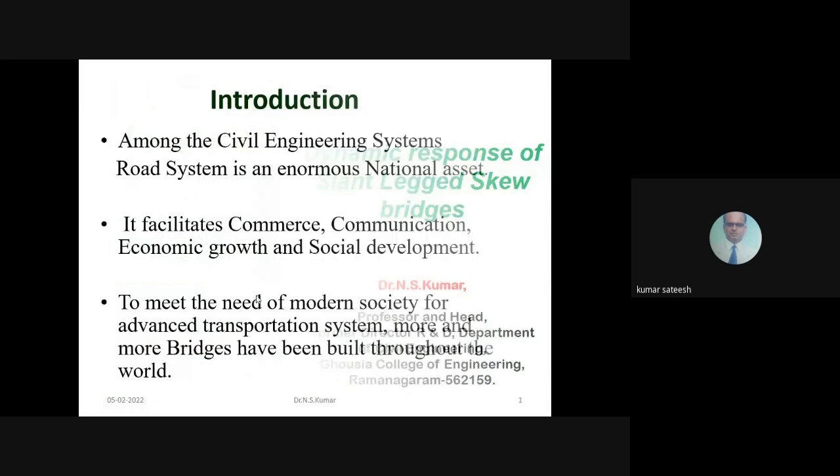As all of you know, among the civil engineering systems, road system is an enormous national asset. Nowadays, they are investing a lot on building flyovers and bridges. It also helps in commerce, communication, economic growth, and social development. To meet the need of the modern society, for advanced transportation systems, more and more bridges have been built throughout the world. Usual bridges we design talking only about static analysis.

What research we have done is, with billion ton miles of commercial traffic nowadays, we have to give importance to the dynamic response. Moving dynamic vehicles create a lot of dynamic stresses on the pavement, and we have to take care of that. Even in bridge code books they are implementing this, especially abroad, and even in India now they are taking a lot of care. There are two types of responses: one is static response, another is dynamic response, which is the response due to moving load.

A load which is a function of time is called dynamic load, and the response due to that is known as the dynamic response. The very interesting fact is dynamic response is much higher than the static response. This is a very important point.

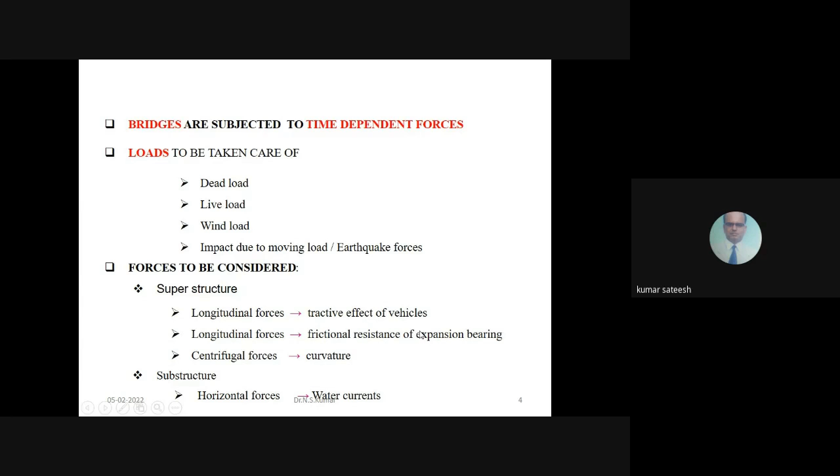Now, the forces to be considered for superstructure are longitudinal forces due to vehicle tractive effect, frictional resistance due to expansion bearings which should not be neglected, and centrifugal forces due to curvature. These are very important things to take into account while designing for dynamic effects.

Now coming to the particular case, slant leg bridge is one among highway and railway bridges. The superstructure and substructure are treated as one unit in this case. It consists of infinite degrees of freedom in our dynamic analysis, because it is not discretized.

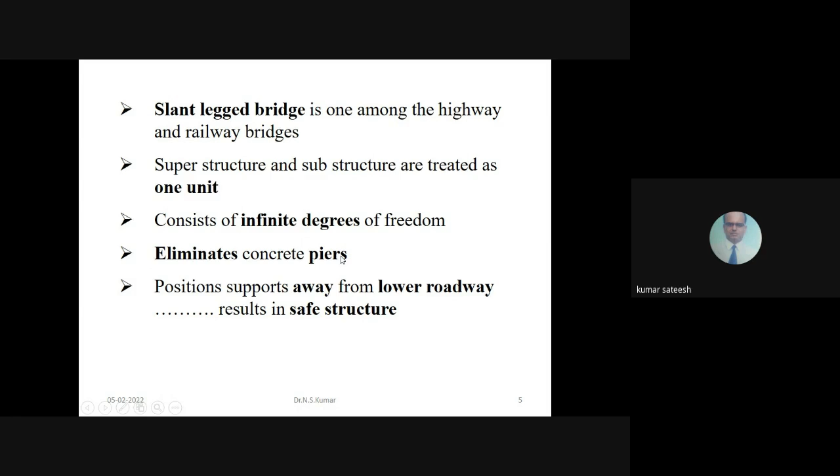Overall, if you say it is infinite degree, it will eliminate the piers, leaving only the left abutment and right abutment, and it will also help since it is away from the lower roadway. These are all important things.

Example of how it looks: slant leg skew bridges. One example exists in Switzerland, which is 70 meters. Span is 18 to the left, 34 in the middle, 18 to the right, so we say it as 18, 34, 18, which adds up to 70 meters. Distance between the foundations is 55 meters, and width is 6.5 meters.

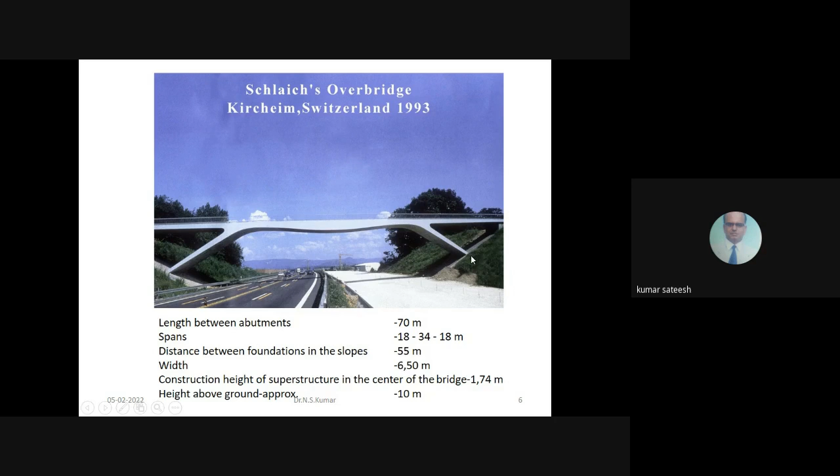Construction height of the superstructure at the center of the bridge, and height above ground, are the data available. The main point is to the left and to the right, this is a clear way so that vehicular traffic is unaffected because there are no piers at all. Only the left side is slanted, connected to the right bund. This is what is known as slant-leg skew bridge.

Some examples I am showing you with all the details: this one near Germany, and this one near Switzerland and the border. All these are existing structures.

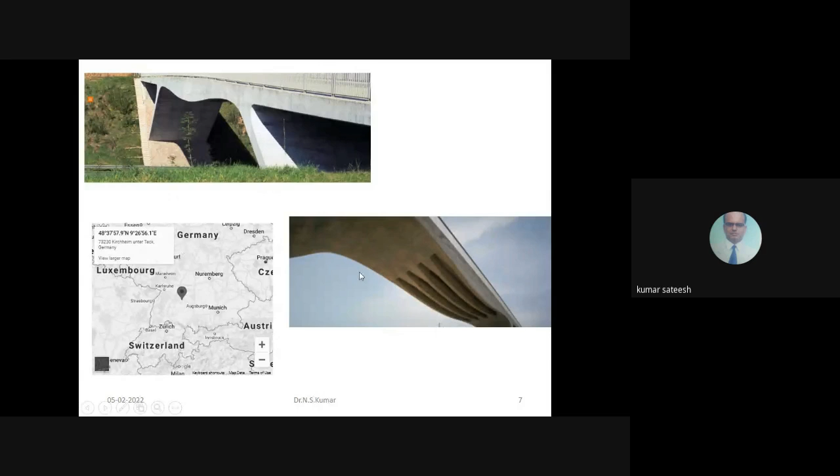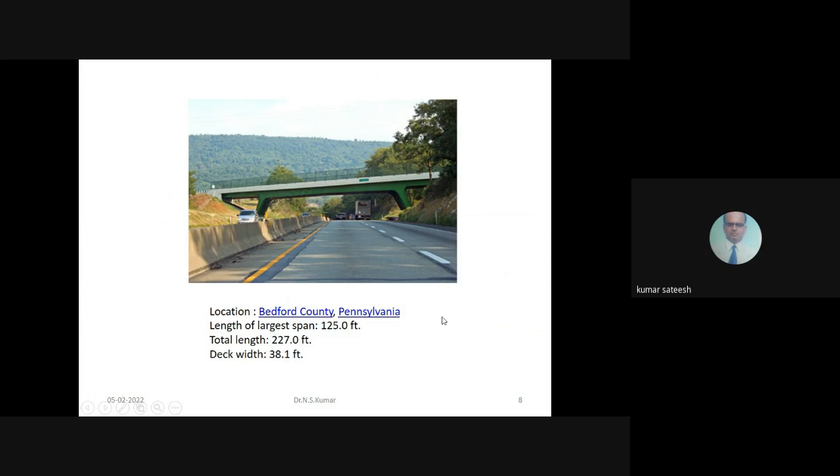This is important. For example, Bedford County in Pennsylvania, this is around 125 feet, total length is 227 feet, width of the deck is 38.1 feet. See this figure, this is existing.

One example, this one from New Hampshire, dimensional length is 160 feet, total length is 295 feet, width of the deck is 65 feet, angle is 10 degrees. So as you go on changing the skew angle, what happens, and what will be the maximum angle? This is our main point of research.

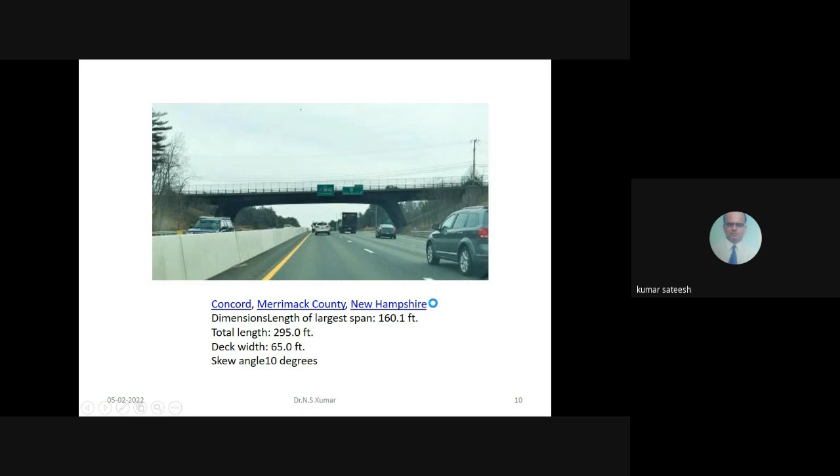So this is why I wanted to talk on this and how they have done it abroad. These are all existing things. Now you come to the next slide. You see here, 295 feet plus, 65 foot deck width. Now if you see this, one minute. I am giving you the examples of all this, New Hampshire and all that.

Now the question is, dynamic stresses are greater than those at static loads. As I have told you already, dynamic response of a bridge resulting from the passage of moving vehicles is a very important study. Now, how do you classify this is the first point.

We can take it either as a continuous mass or as a discrete mass. This is what we teach even for students in dynamic classes. It means either it's a lumped mass approach or a continuum approach.

One more is called orthotropic plate theory, which is 2D with a continuous mass distribution. Either we can use this type of theory or go for finite element method using discrete theory, which many softwares now offer.

So overall we have continuous mass distribution, discrete theory, and orthotropic plate theory which is 2D. Now coming to the lumped mass approach, we have 1D, 2D and 3D. This is how we study the dynamic response in case of any structure.

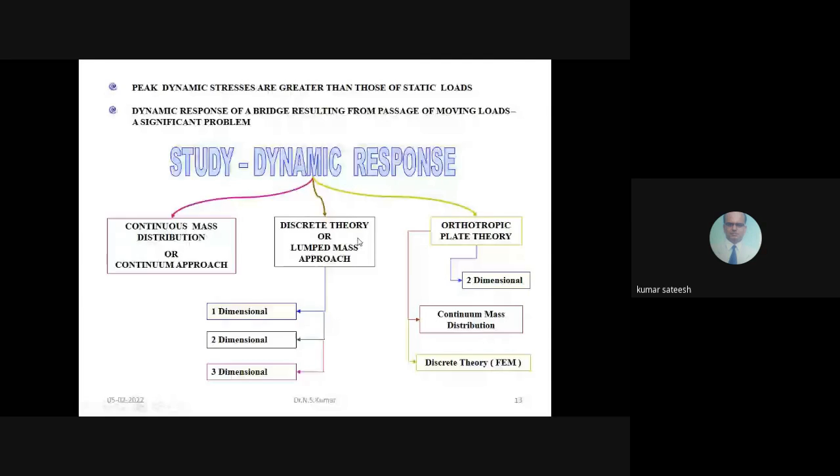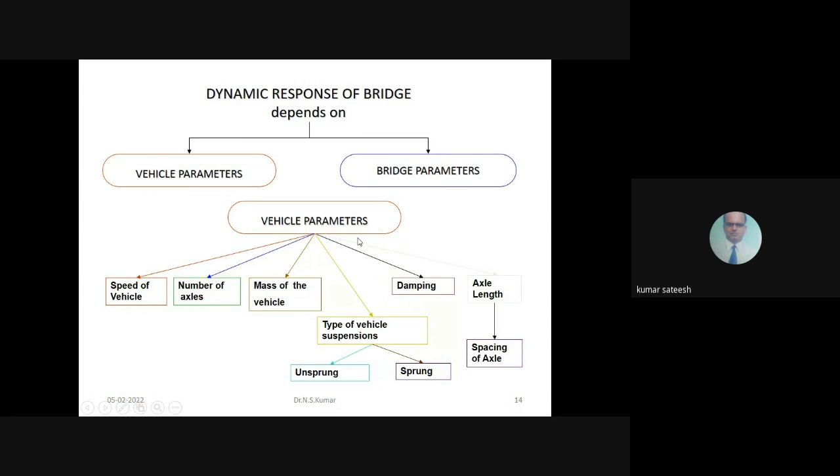Now in particular to bridges, this depends on vehicle parameters and bridge parameters, and a lot of vehicle parameters have to be considered. For example, speed of the vehicle, number of axles, mass of the vehicle, damping, type of vehicle suspension which may be sprung or unsprung, axle length, and spacing of the axle. These are the things we are considering.

Now, we have already done a lot of research, that is called literature review. It started in the year 1974 itself by Ghobarah and Tos. That paper analyzed the Foothill Boulevard undercrossing Southeast Bridge, so this is one of the starting points.

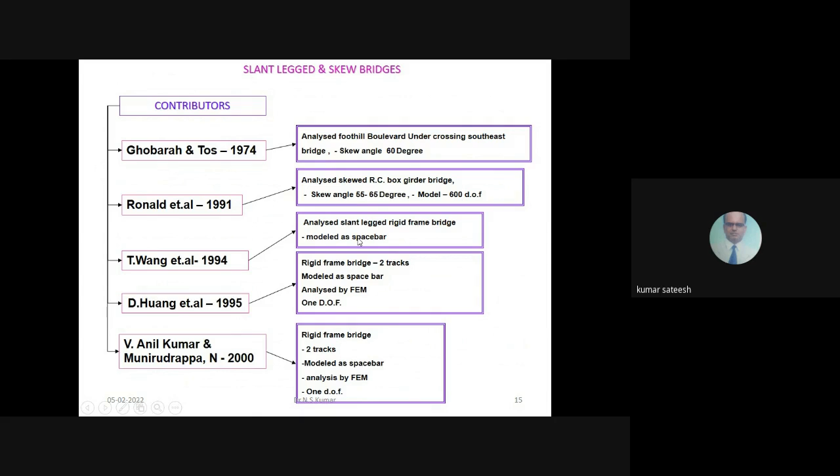Next, so many people contributed. For example, in 1991, 94, 95, and 2000, also from Munirudrappa, who was my PhD guide, and his student. They studied rigid frame bridges, skewed RC box girder bridges, and slant-legged rigid frame bridges, also by Wang. These are some of the literature reviews I did.

Then what is the work? Some parameters to be considered, mainly in this work regarding vehicle: axle spacing, vehicle speed, damping of the vehicle. But regarding bridge, we consider span, stiffness, mass, damping, skew, pavement roughness which is a very important factor, roughness coefficients, surface roughness, and spacing of longitudinal and cross beams. These are the things to be considered.

But the actual work involved in this report is free vibration studies, forced vibration studies, how to assess surface roughness related to dynamic response, vehicle bridge interaction studies which we call VBI, and modern structural control systems. Nowadays they are using tuned mass dampers, to be adopted to achieve the desirable response for an external load. So these are the present study.

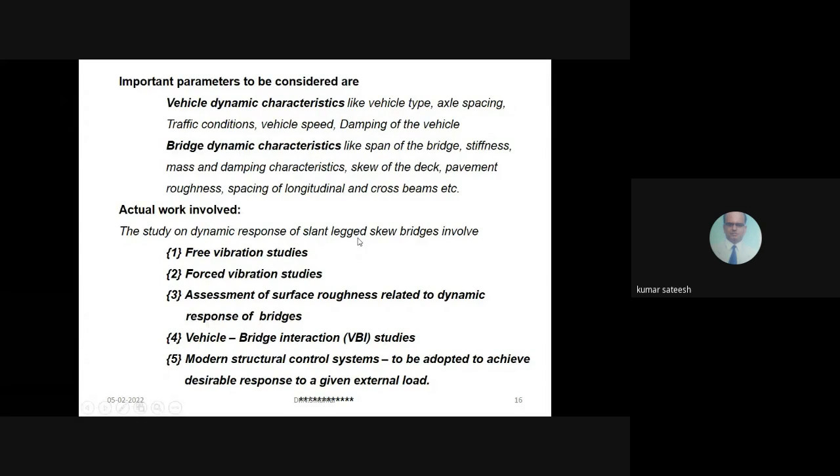What is done is, we can't give a choice; we are doing both free vibration and forced vibration, along with vehicle bridge interaction, VBI, which has to be considered. Now this whole topic is based on one factor called dynamic load factor or dynamic amplification factor, that is called DAF.

Hope I am audible, participants? Hello, hello. Yes sir, yes sir, okay sir. Audible, sir. Audible, sir.

Thank you. What is happening in this whole topic is load factor, we call it DLF in this topic because it's due to dynamic effects. DAF means the ratio of dynamic deflection to static deflection, dynamic deflection due to movement of vehicles divided by static deflection due to self weight. This is the very important study here. It's called DLF, and it's a function of the natural period of the structure, which is one over frequency natural, the reciprocal of the frequency, and relates to how much time that impulse is there.

The impulse may be any shape we take for analysis - trapezoidal, rectangle, triangle. It's a small time for a small duration where a large force will be acting. So a force acting which is very high in magnitude, but with time duration in seconds, that is called an impulse.

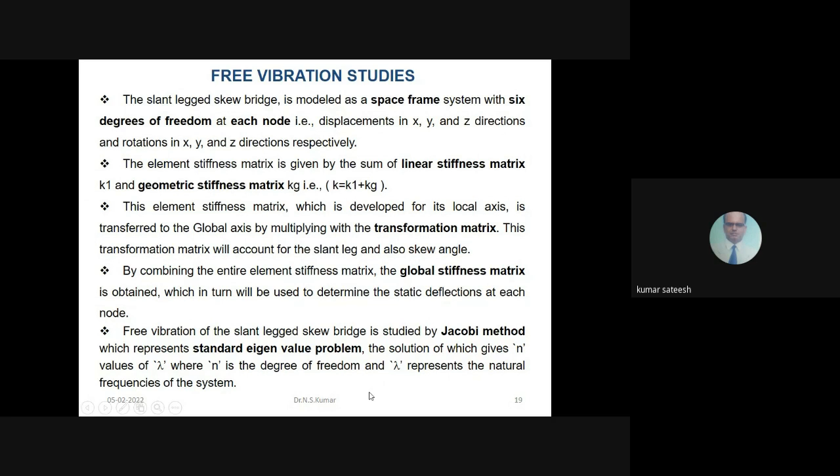So the free vibration of the slant bridge is studied by which method? Jacobi gave a particular method in mathematical analysis which represents an eigenvalue problem, as we know in dynamic analysis. The solution gives n number of natural frequencies, where n is the degree of freedom and lambda represents the natural frequency.

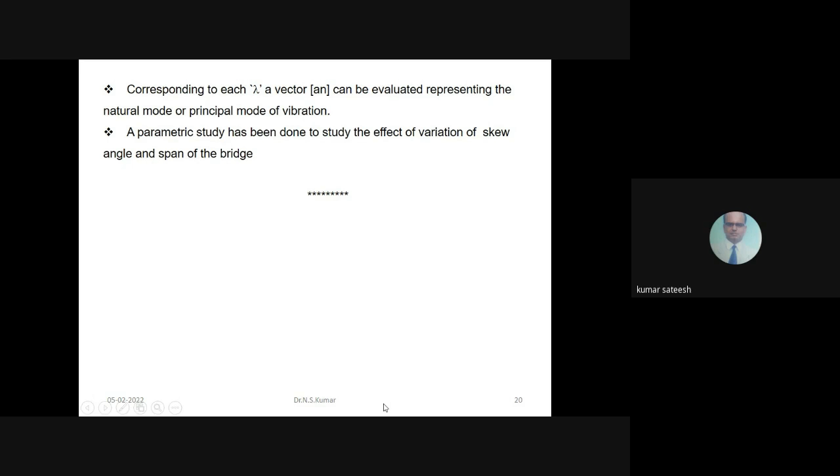Based on this, each lambda gives us a vector, which can be evaluated representing the natural mode or principal mode of vibration. So a parametric study will be done to study the effect of the skew angle and span of the bridge. This is the whole story for free vibration analysis.

Okay, how to do this formulation of the stiffness matrix? If we are strong in mathematics, or know the background of matrix analysis of structures and structural dynamics, we can formulate the member stiffness matrix. This is what I have explained here in detail.

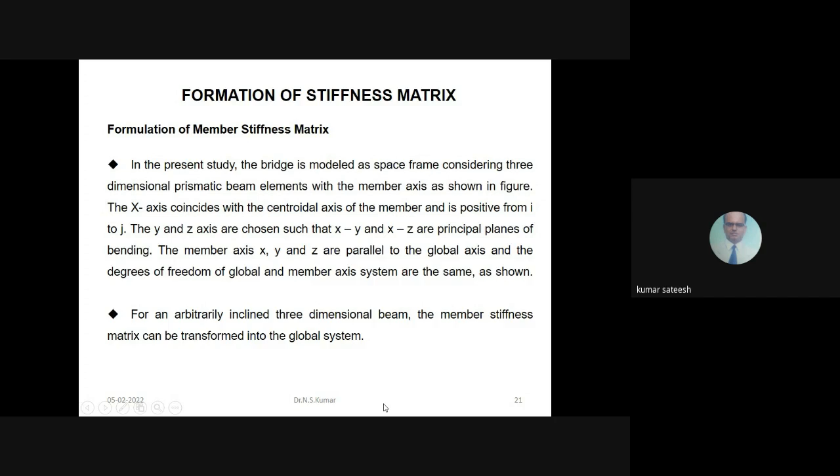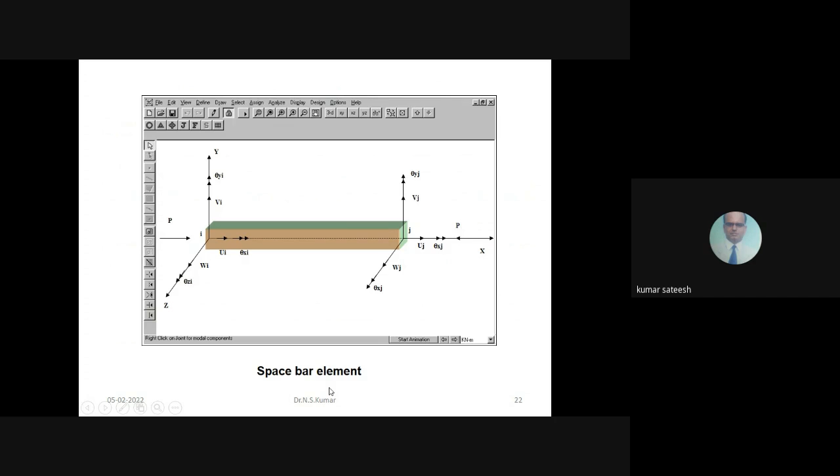Please see this sketch of a space bar element, with example I and J nodes - I'll explain one bar. As I told you, there are 6 degrees of freedom on the left and 6 on the right - 3 rotations and 3 displacements - theta xi, theta yi, theta zi. I'm showing you all the symbols.

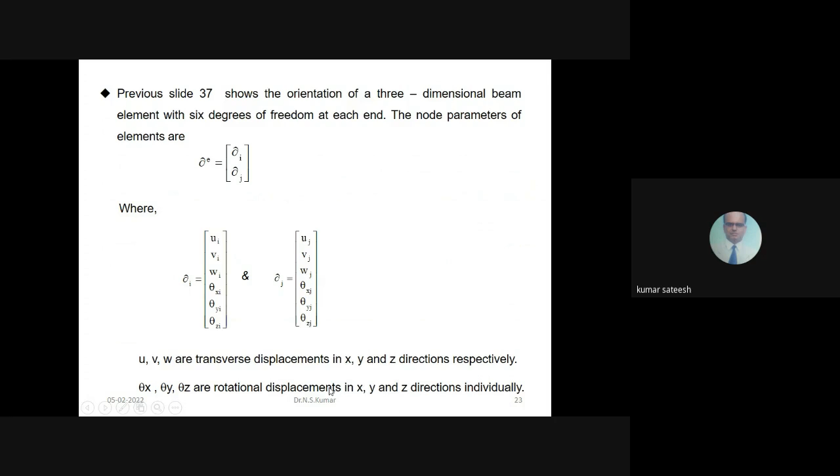It's one element. Now I'll explain this one by one. Each ui, vi means these are the displacements - all transverse displacements in x, y, and z directions, and for rotational displacements, theta x, theta y, and theta z.

Then we know the standard element stiffness matrix - as I told you, it should be linear plus geometric added together. After getting this, I must go for the final step, the transformation matrix. What is that? I am explaining here.

It's a diagonal matrix - only diagonal elements are available, R, all others are 0, 0, 0, and it's 4 by 4 in size. Now let's go to the next one. These are all much of mathematics, just shown to explain - all these are basics.

See here, this is it - finally we get the stiffness matrix, that is the transpose, R transpose Km into R. This is usual, we know how to do this.

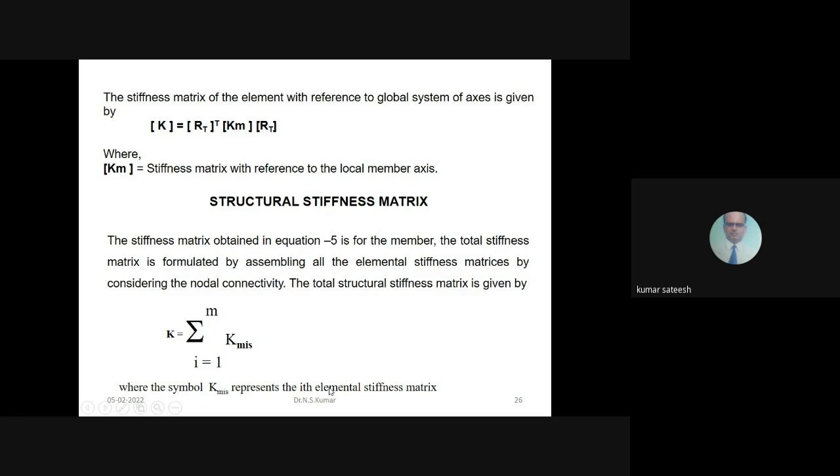This is the formulation. Similarly, finally, to get the global matrix, it's the summation from one element to any number of elements, i equals 1 to m, each taken as sigma. So this represents the element stiffness matrix. Now this is regarding free vibration dynamic analysis - now let's come to static.

Statically, we know F is equal to K delta, or Ku. Same formula, but the question is F is a vector, K is a matrix form, and U is displacements. This gives us the displacement vector, load vector, and structural stiffness matrix. Already I have explained, it's a square matrix.

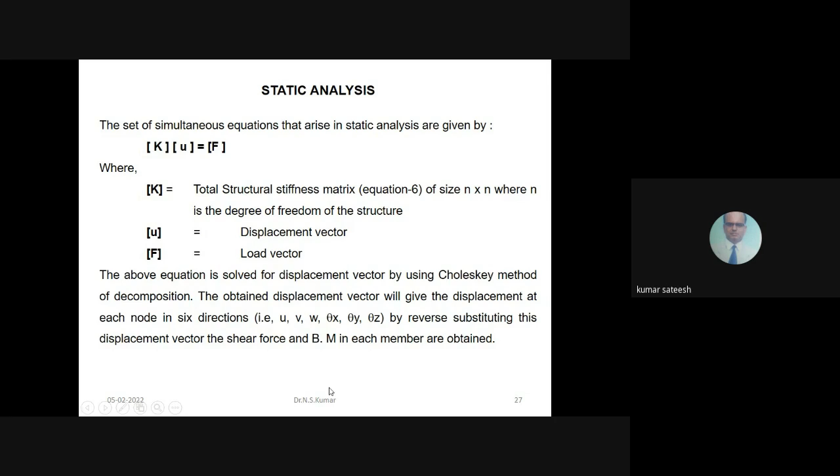The above equation has to be solved for the displacement vector, and what method is to be used is the point. Finally, after going through the literature review and so many things, Cholesky method of decomposition is the best. This is a very easy procedure which many have learned in mathematics in UG and PG classes. Cholesky method of decomposition will be used, and we are going to get the displacement vectors.

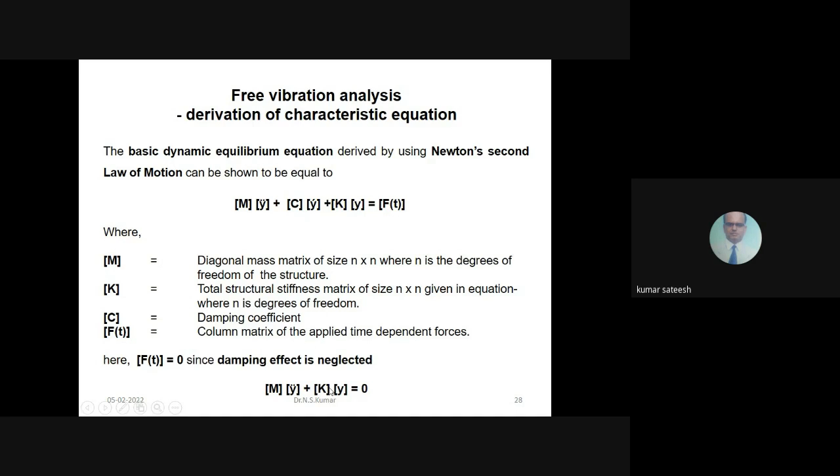These are all standard dynamic procedures, and this is done by Fourier. He tells how to do this: periodic motion can be represented by a series of sines and cosines in Fourier series. This is the whole thing we have applied here, and hence with this mathematical background, Y double dot, how to find the acceleration.

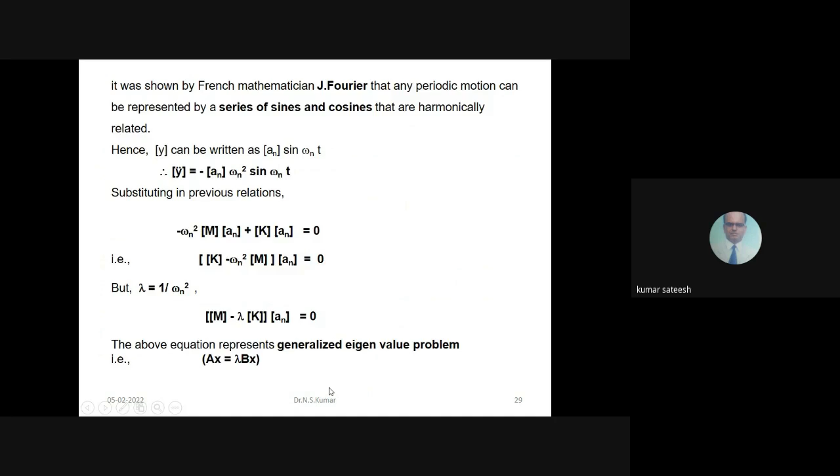Then finally the form will be M minus lambda K, of an, equal to 0. The above equation represents a generalized eigenvalue problem, which I have already told you. To get a non-trivial solution, we know the determinant must vanish - the determinant corresponding to this vanishes. So this is the procedure for all structural dynamic problems. The above determinant we call the frequency determinant.

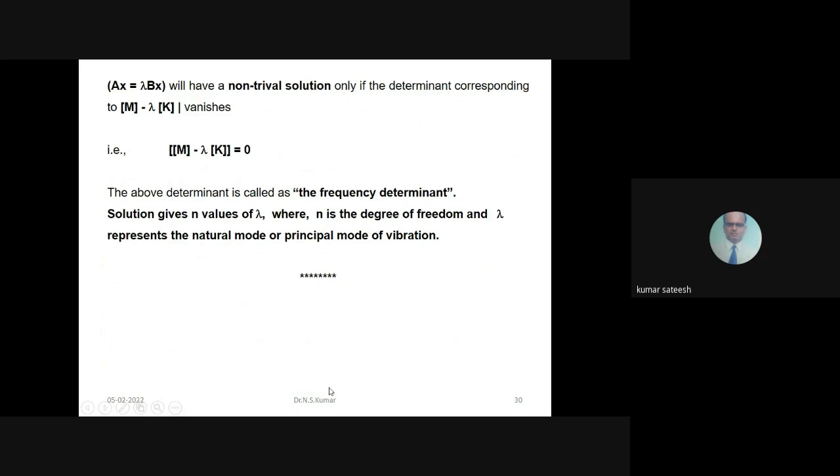Solution of this is nowadays very easy because software is available - we need not do hand calculations. You get in seconds all values of natural frequencies, and also n is the degrees of freedom, and you get all natural modes or principal modes of vibration. Then after getting this, how to convert the generalized eigenvalue problem to a standard problem - that is the next step.

All this I have explained, just I am repeating it. And finally, I told you I am using what is known as Cholesky's method.

After explaining all this, suppose you come to numerical computations, how to find - the idea is to find natural frequencies. Computer programs should be developed, which I have developed for my research work here. That's why I am explaining what I did, using MATLAB in those days.

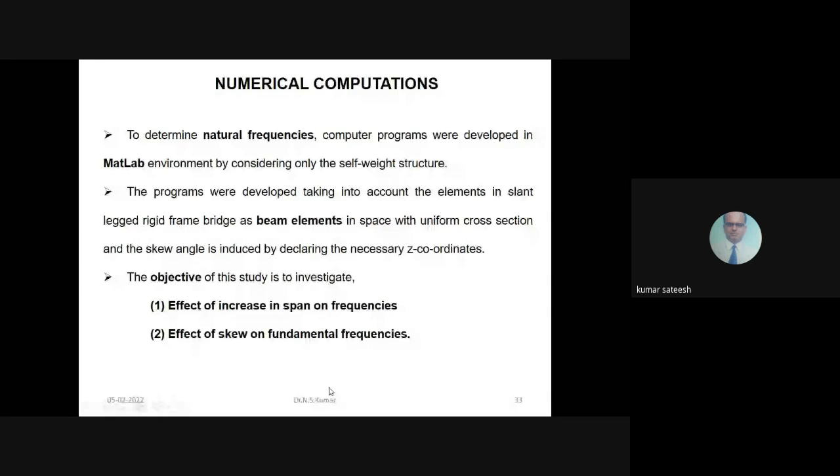These programs were developed taking into account elements in a slant legged rigid frame as a beam element in space with 6 degrees of freedom. I explained different cross sections you sketch are all considered, and skew angles are varied. What is the objective? To know the effect of increase in span on the frequencies - as span increases, what happens to frequencies - and the effect of skew on fundamental frequencies.

These are the two parameters taken for study, and the bridge is modeled as a space frame, already told you as 6 degrees of freedom. The span considered is 20, 32, 20, so it will be 72 meters. Slant legs are at 45 degrees to start. Cross beams are spaced at 8 meters. Longitudinal beams are at around 4 meters. Cross sections considered are T section, I section, and box section - these three sections were taken into consideration for our study with 45 degree slant.

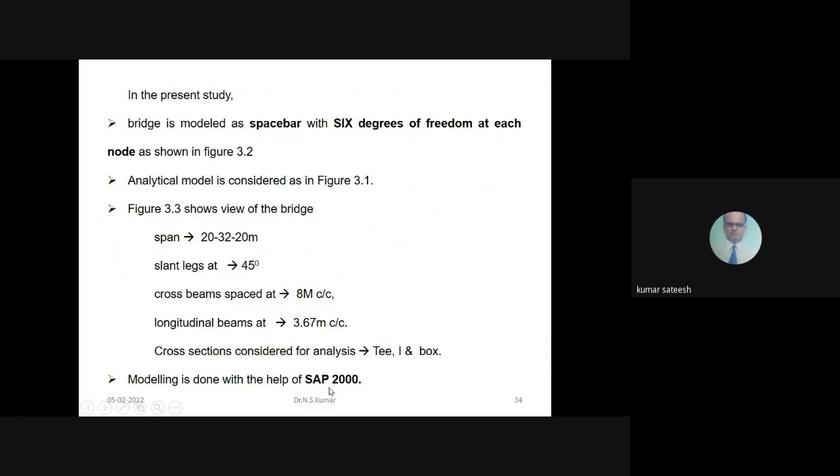Then what happens? All these were modeled using SAP 2000. So what happened after modeling? We came to know we got some first five frequencies which are very important for both 1D and 2D behavior, and different spans are also considered - 12, 15, 12, 15, 18, 15, 17, 21, 17 like that. And we have taken three sections: T, I, and box.

It is observed that as span increases, frequency decreases - that is the first point. Second is with respect to skew: as skew increases, it was observed that the fundamental frequency tends to increase non-linearly.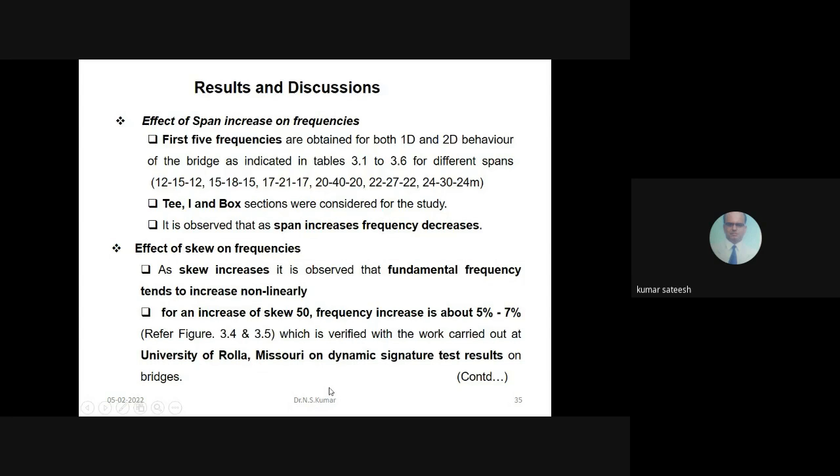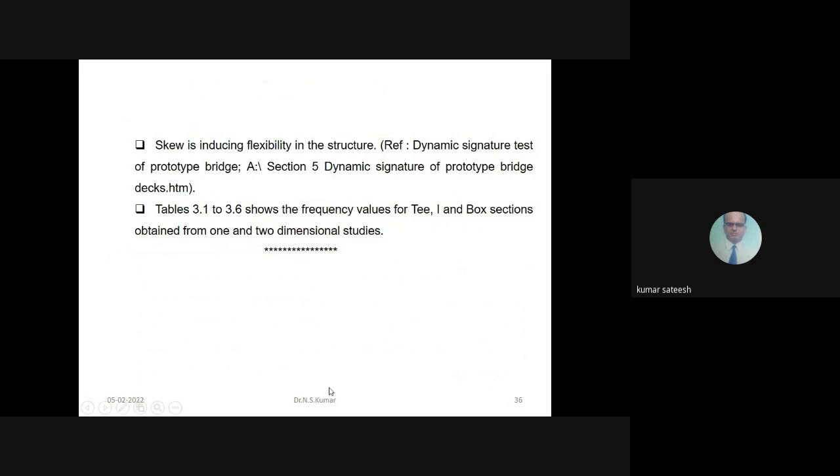So we should be careful about skew angles. It is a non-linear increase. For an increase of 5 degrees, frequency increase is 5 to 7%, which is verified with the work carried out at University of Rolla, Missouri on dynamic signatures of the test results. Those results I verified again, and we came to know from our experiment the skew is inducing flexibility in the structure.

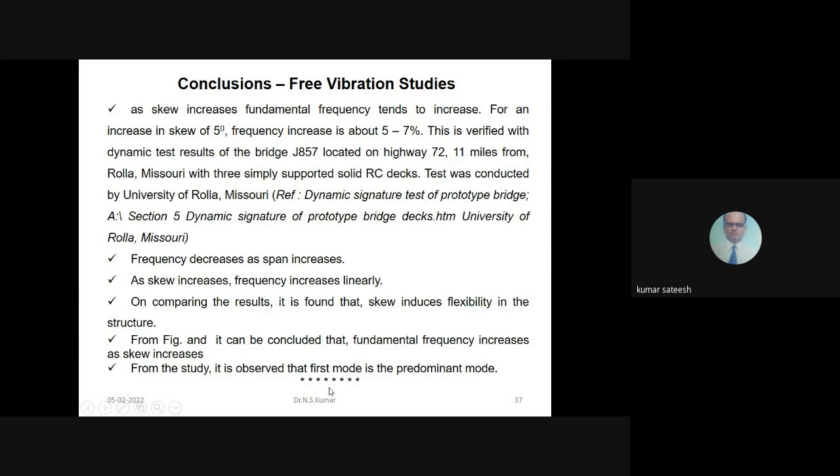So final conclusions, what did I tell you? Frequency decreases as span increases. Skew increases, frequency increases linearly. After a certain degree of skew, it becomes non-linear, and that is very important. The range will be around 5 to 7%. These are what we have observed in our research study.

So this is just the result analysis. Frequencies F1, F2, F3, F4, first 5 frequencies. Spans have been considered for our analysis. These are the frequencies for the slant legged skew bridge of 1D, one dimensional, area of the T section, moment of inertia for this. Similarly for 2D, what are the changes?

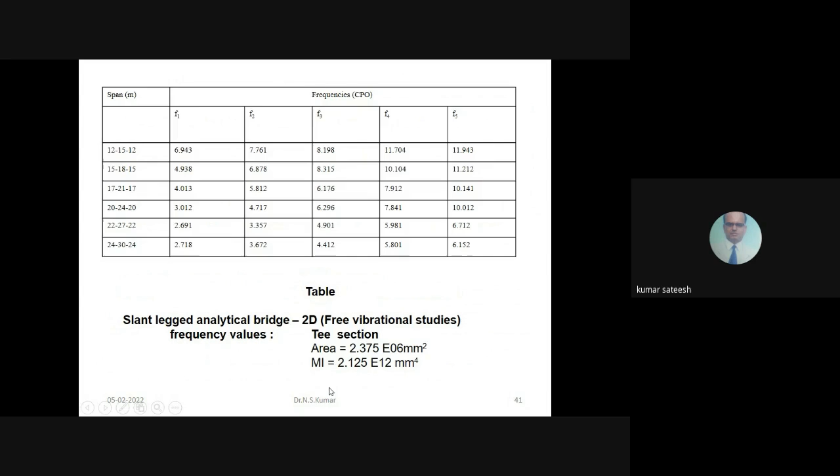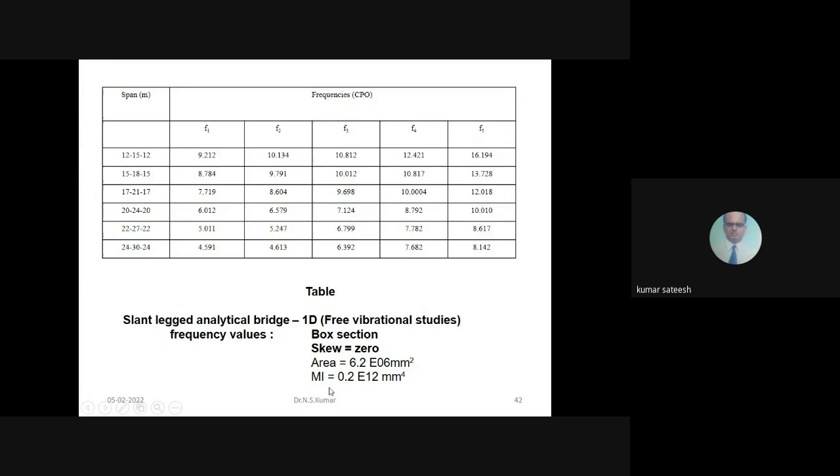Similarly for this one, free vibration for I section, free vibrations for T section. Again 5 frequencies. All these were calculated including box section with zero skew also, meaning without skew, then we went for skew increase. These are the very important studies done for all the types of sections, and we use this analytical model of the bridge because we have to analyze.

So how many nodes? 17 nodes, 1, 2, 3, 4, 5, 6, 7. See here, the deck has been discretized, and the slant leg 5 to 16 is one stick, 11th node to 17th node is one stick. So 5 to 16 and 11 to 17, between 0 means no skew.

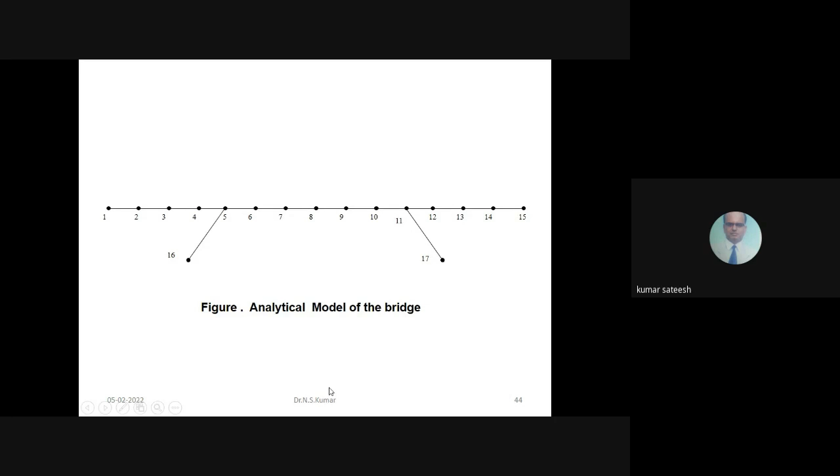Next you go to 10 degree, 12 degree like that. Minimum and maximum we have to fix so that at what stage you will get non-linear skew variations. That was also checked. So this is what was actually done for our analysis, free vibration using SAP 2000.

This is the model I am showing. See this, you are seeing the screenshots. What is done, it's not simply somebody's work, it is my work for my research. This is the thing, and also these are your variations.

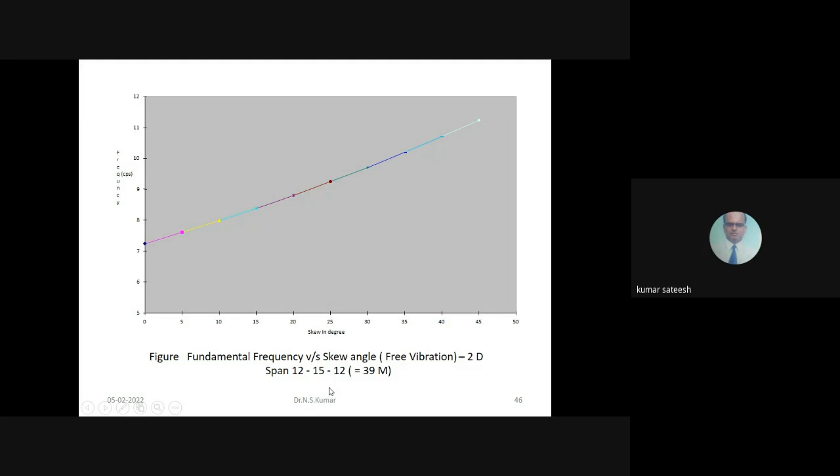What CPS, okay, cycles per second, frequency versus skew degree between 0 to 50 degree variations, fundamental frequency versus skew angle. Example, one span I am showing you like that. All the spans were analyzed, and these are the plots for all the different ones using SAP.

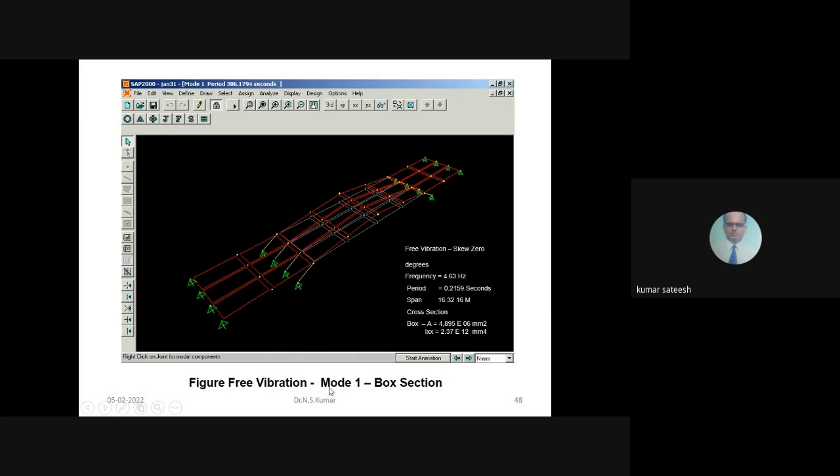This is the modes of vibrations you are seeing here. Period is 0.21 seconds for this span. Cross section is shown, frequency 4 hertz, 4.6, no skew. Suppose skew goes on increasing, what happens to the period, frequency, cross section, how much? All this is more than 6 years of study.

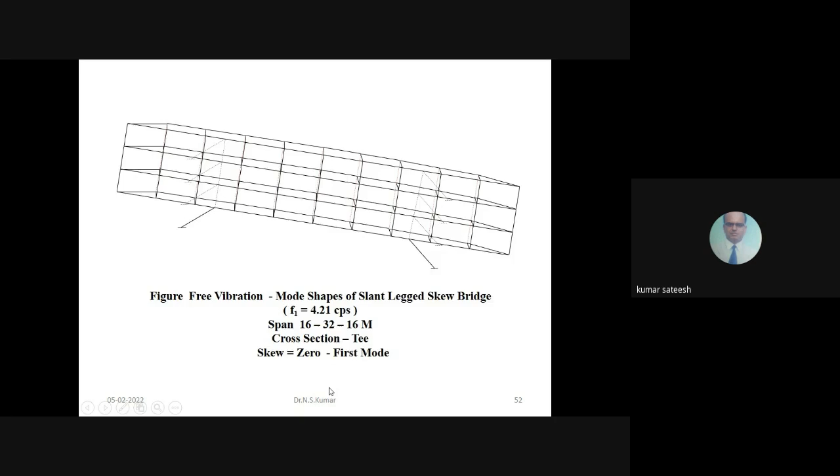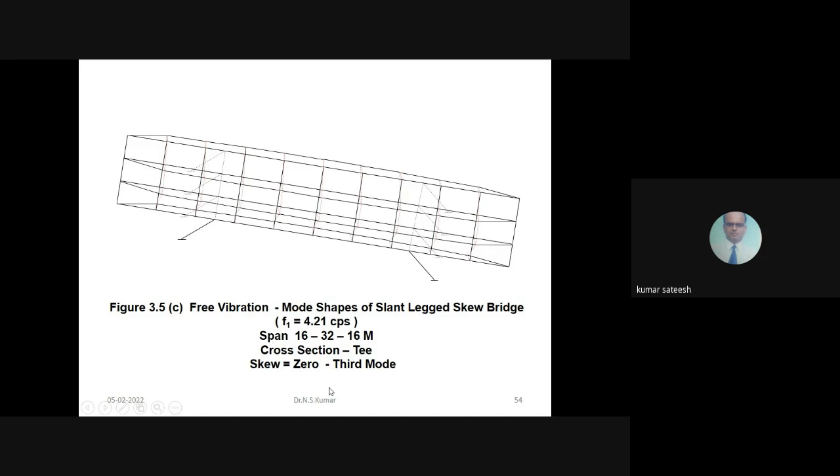So all these models I am showing you with 0 degree, these are for different spans. Figure, free vibration mode shapes. I felt that 4.21 CPS is okay for the particular span. This is the sketch. So now you see this is for different 16, 32, 16, and also for T section of same span, different span is same, cross section is varied for different skews and same skew. So all these sketches you can understand.

So this is how I came to know which is a very important factor for free vibration. Then we thought of doing forced vibration. In case of forced, I told you what force I have to take. It's a time varying external load, as you know, it's a dynamic loading, and it's a very complex phenomena because I have to consider the interaction between the bridge and the vehicle, that is the main point.

And we know in our dynamics so many types of impulses. Usual moving triangular pulse is the best for such studies for highway engineering, for traffic. Therefore, we have taken moving triangular pulse. And this was first of all checked, is it okay or not, with a very important fundamental paper from Filho. He is a very important person, father of structural dynamics, Filho. His paper, known as Dynamic Influence Lines for Beams and Frames, in the year 96.

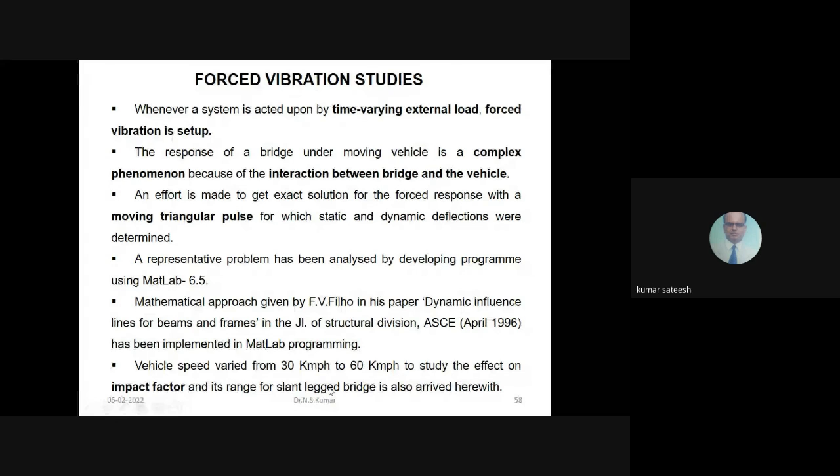It has been implemented using MATLAB. We have changed it, first we wanted to verify the results, then the speed of the vehicle, usual 30 km per hour to 60 kmph, using impact factor, and its range on the slant legged bridge is also considered. Filho developed a general method for calculating response using constant force moving at constant velocity, using a discrete model for mass distribution. Now the question is moving force, how to idealize using a triangular pulse.

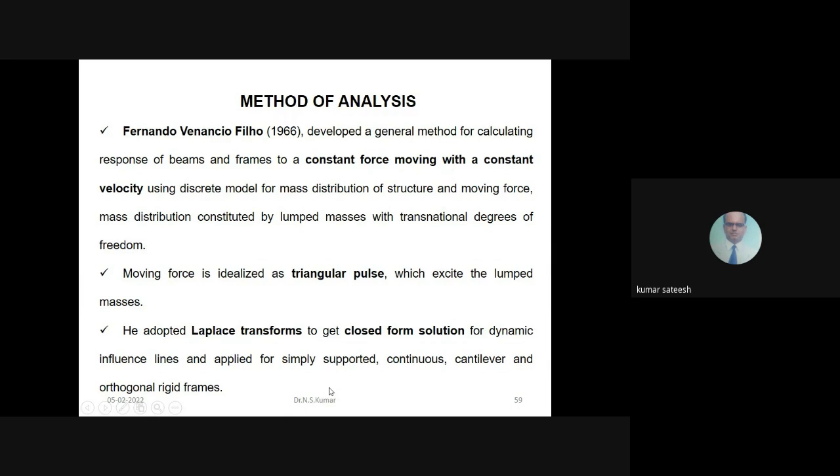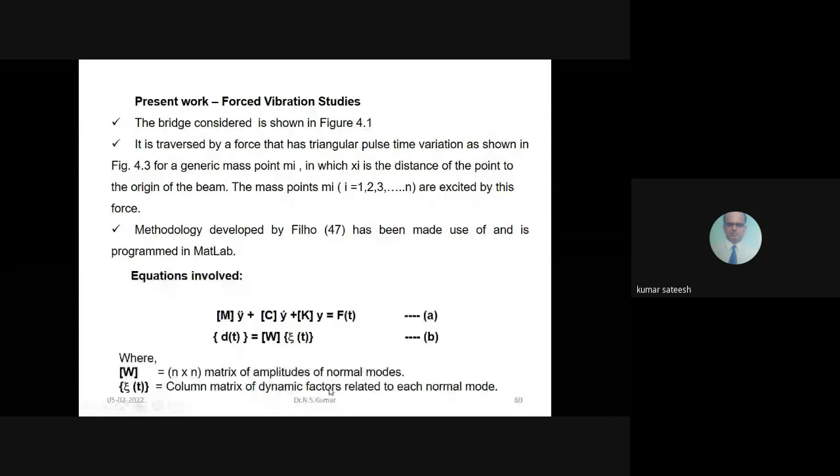Please see lambda, diagonal matrix plotting. Next we multiply by the column matrix, then it becomes the square matrix of squares of natural frequencies. That is called eigenvalues - eigenvalue means square of the natural frequency. If you take the square root, you get the natural frequency.

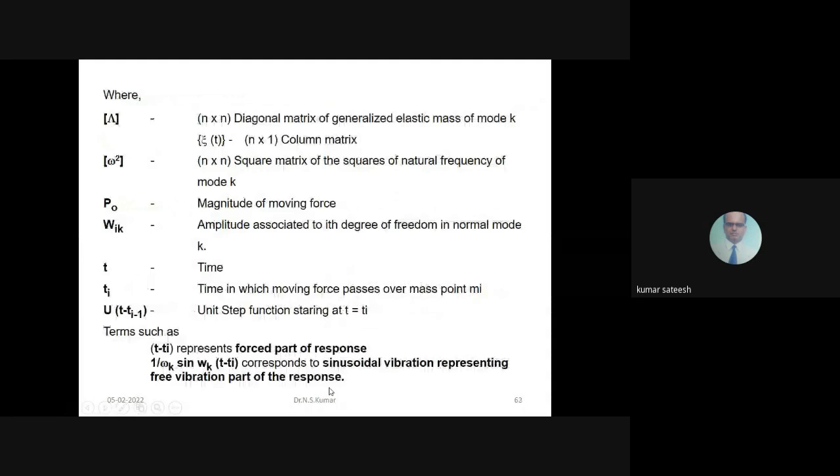This is the background, and if you understand the background, it will be very easy to carry out the research. So these are the equations, and using dynamic factors, one who is interested can go through Laplace transforms and model all these things. Finally, dynamic influence line of deflections are obtained using triangular force.

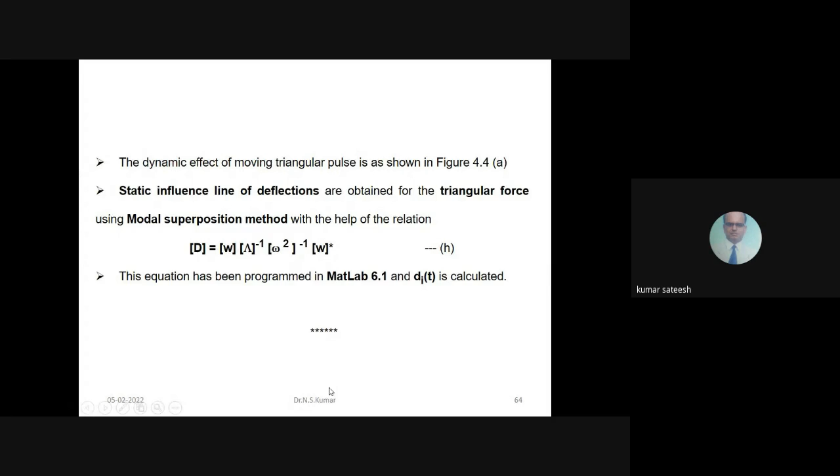Which method? There are so many methods. The best method was modal superposition method, and this is the equation which we have used in MATLAB programming. We have done this numerical analysis, same as what I did for free vibration. Now I am showing you forced vibration studies - how to do it using the model.

In those days we have also used SAP. Now there are so many better softwares you can verify for next research continuation by research scholars interested in this field. Different spans were considered, center to center is 4 meters, and we developed the program in MATLAB 6.5 version with the help of Simulinks. EWM, exponential window method, is one of the methods used in Simulinks, and it was run for all the different cross-sectional properties.

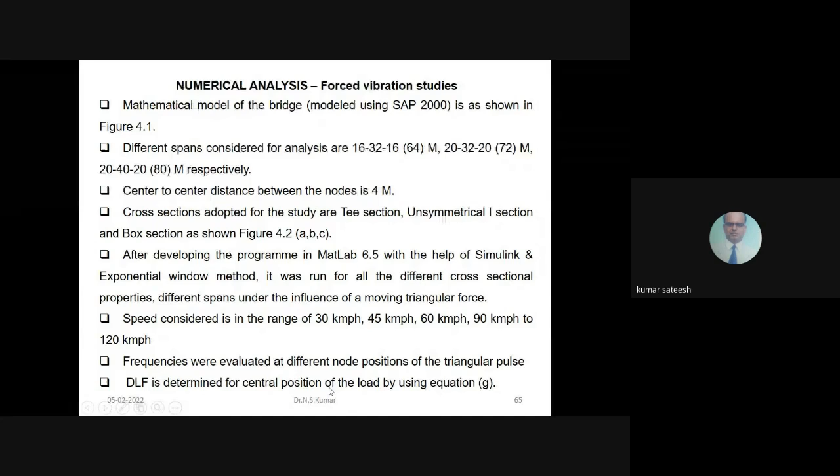Speeds considered were 30 kmph, 45, 60, 90, 120 - different ranges of vehicle speeds - and we calculated the frequencies for node positions. DLF, as I explained, is found at the central position of the load using the equations developed. So all these final results I am showing you for 30, 45, 60 - all the results. Spans considered were 64, 72, 80, because existing bridges were also shown.

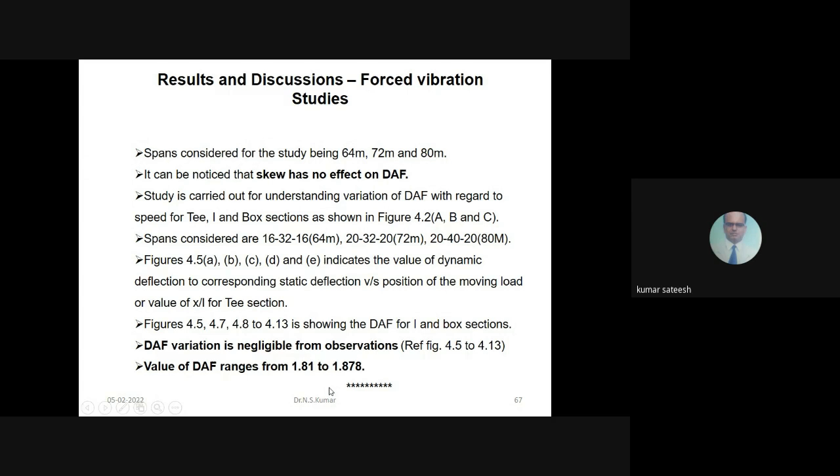It can be found that skew has no effect on DAF - that is very important in case of forced vibrations. These studies were done for different spans, and DAF variation is negligible from all the observations. So what DAF range did we get? Between 1.81 to 1.878, with no units for that.

Therefore, the largest dynamic load factor occurred at the center of the midspan. Dynamic load factor increases with vehicle speed - if vehicle speed is increased, then DLF increases. DLF also increases as span increases - as the span of the bridge increases, DLF increases. Vehicle speed increases, DLF increases.

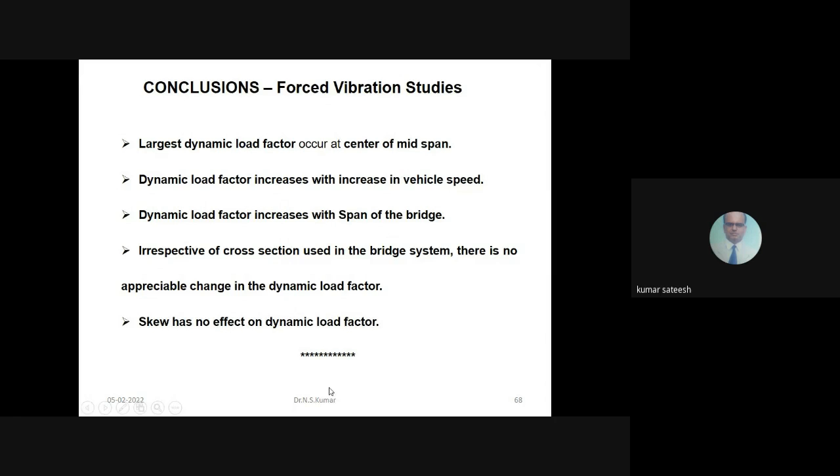Where did we get the maximum? At the center of the midspan of the bridge. Irrespective of cross sections - for example we took box, I-section, Tee - irrespective of the shape, there is no appreciable change in DLF. DLF is independent of cross section shape. Skew has no effect on DLF. These are all very important conclusions.

Finally, these are the conclusions for forced vibration studies, same as I explained for free vibration study. After these two studies, we should not stop, because the vehicle has to move on the bridge and a lot more is involved.

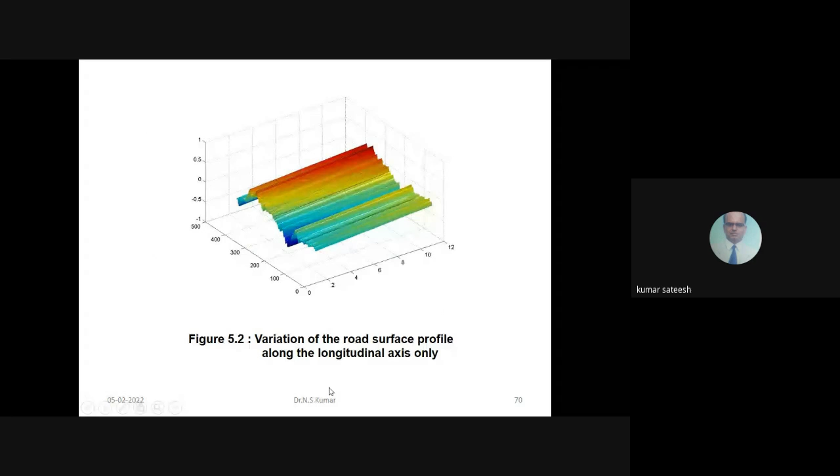Therefore, what we have done is two-dimensional slides of the roads were taken - two-dimensional road surface. This is very important for road surface roughness. See here, the variation of the road surface profile along the longitudinal axis - this is very important, how it looks. This was considered for the next study.

That is called road roughness surface analysis. Some papers searched were from 1974 by Dodds, who explains the roughness coefficient, how to consider it - we call it power density, with unit meter cube per cycle. Also, one from Chiu Liu et al., 1995, who studied PSD, called power spectral density functions. Using this, road roughness was calculated.

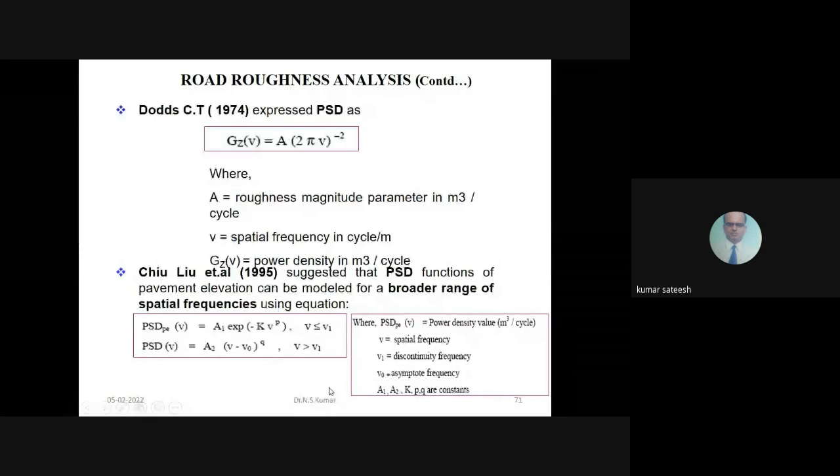In the present study, road roughness was considered as a zero mean stationary Gaussian random process in the mathematics, and I have solved all these equations. The Artificial Road Profile Generator is a software tool which we have developed, using MATLAB 6.1 version, PCWIN, to evaluate the road surface profile with and without camber.

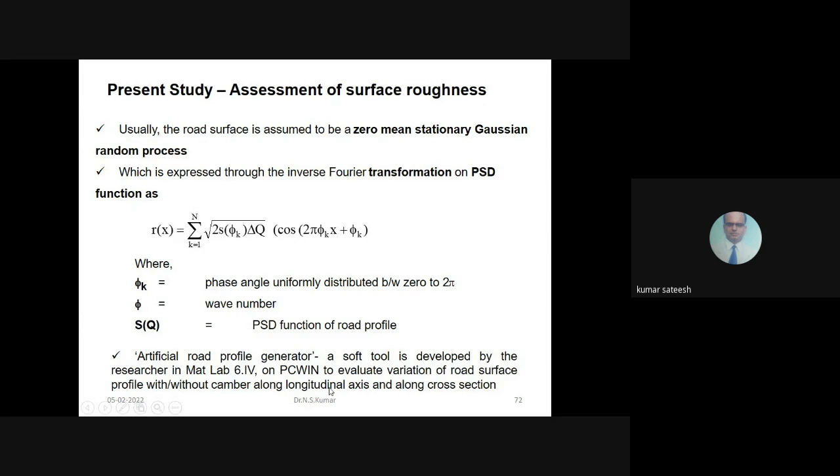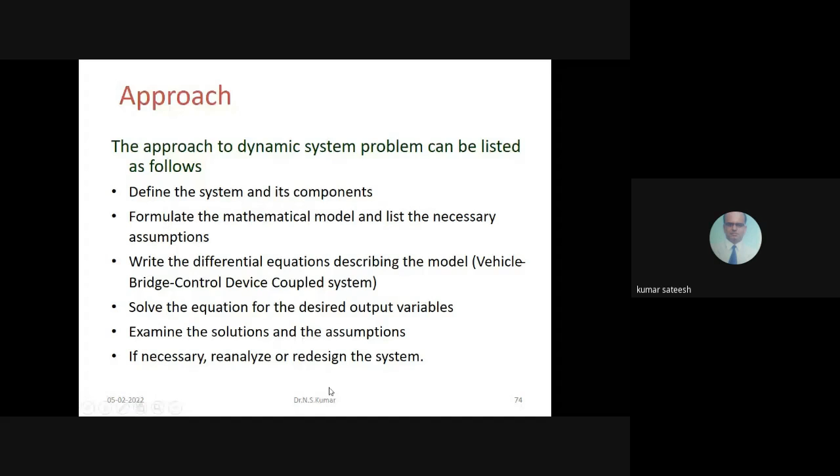This is the approach I have explained: define the system and define the components, formulate the mathematical model, list the required assumptions, write the differential equations, describe the model, since this is a vehicle bridge interaction model, which is a coupled system. Solve the equations for the desired output, examine the solutions and assumptions, and if necessary, reanalyze and redesign. These are the steps followed.

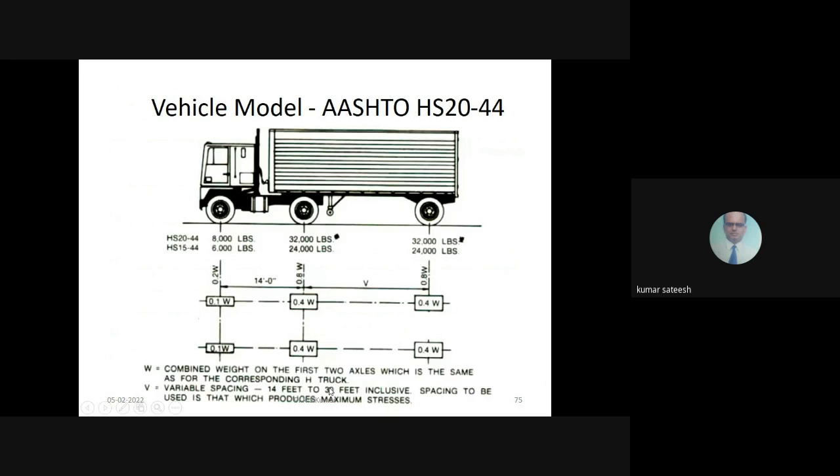Please see here, the vehicle model considered as per AASHTO specifications, HS20-44, all these as spring mass systems: front tire, rear tire, middle tire, combined weight on the first two axles, all considered as per standard. This is the model moving on the created model in the software, a 3D moving vehicle, spring mass systems shown with damping.

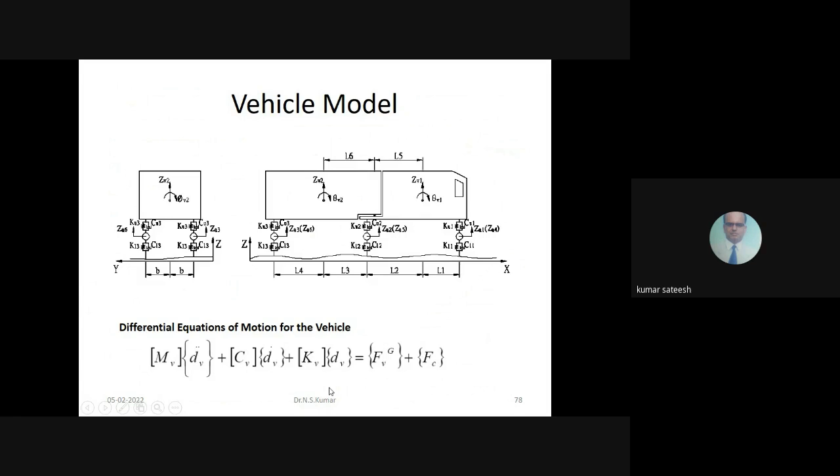Next comes the actual model. I explained the differential equation, almost the same type as mx double dot, but here with respect to mass of the vehicle, damping of all the tires, and stiffness of all these, considered both due to gravity and due to moving mass. So this is the vehicle model equation. You see these centrifugal forces in the differential equations.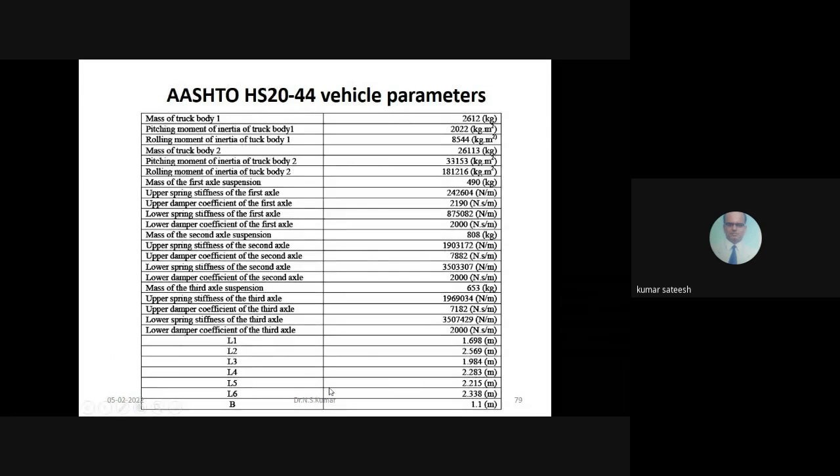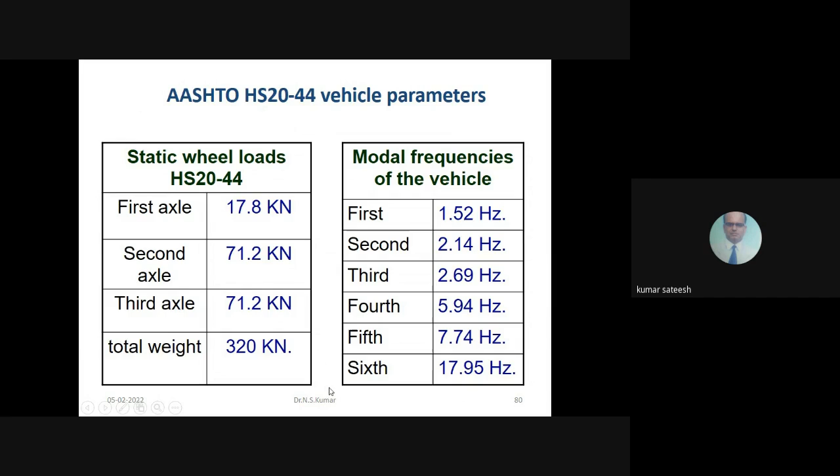I am telling you these are the specifications. Mass of truck: 2612 kg, for example, pitching moment. These are all standard charts we obtained for each vehicle, which you can change for present day vehicles. And these are the static wheel loads, and we got the frequencies: 1.52 hertz, 2.14, and so on for 6 frequencies, whichever is the least is called the fundamental frequency. First axle, second axle, third axle, total weight were considered.

And here, the bridge model considered is also very important. It is modeled using a conventional FEM, finite element method, and the equations of motion for the bridge can be expressed in the following equations, which you can go through.

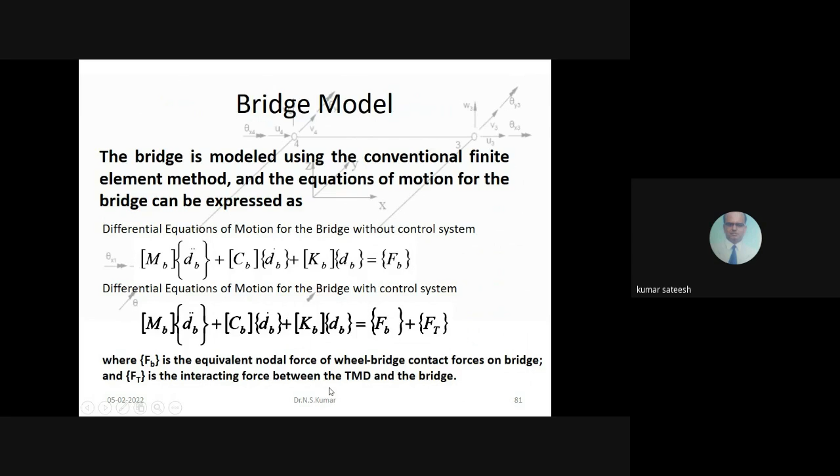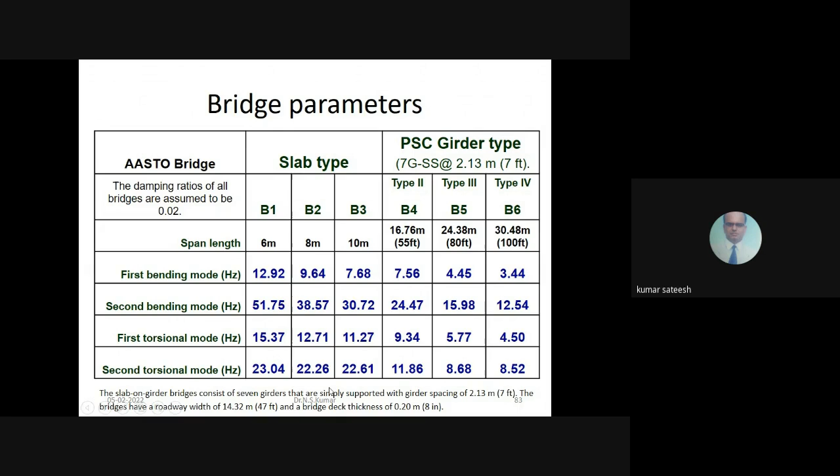Vehicle bridge model interactions were developed, and bridge parameters as per AASHTO bridge, slab type, PSC girder bridge, all with 6 meter, 8 meter, 10 meter spans. First bending mode, second bending mode frequencies in hertz were analyzed for type 2, type 3, and type 4 pre-stressed concrete girder type and slab type bridges. With all the inputs and outputs, the first mode of the bridge is very dominant.

To reduce the bridge dynamic response, we use what is known as a Tuned Mass Damper, which has to be tuned to the particular frequency, called TMD. That also has to be adopted, and it will be positioned at the center of the bridge. These TMDs are already being used in Japan and China, and even we are using them here.

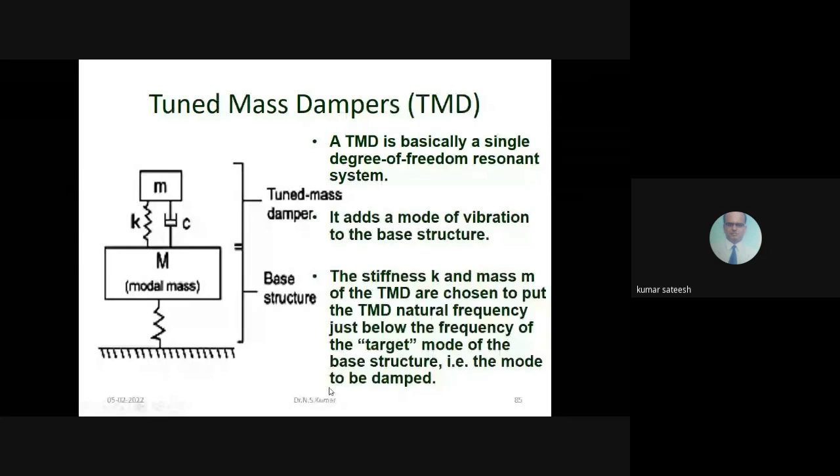Basically it's a SDOF system, and it adds to the modes of vibration. You have the mass, spring, damping, modal mass. I am showing you the sketch, and we have developed the equations and magnitude of displacements versus frequency, time history analysis using the software. This causes a very strong dynamic interaction in the TMD.

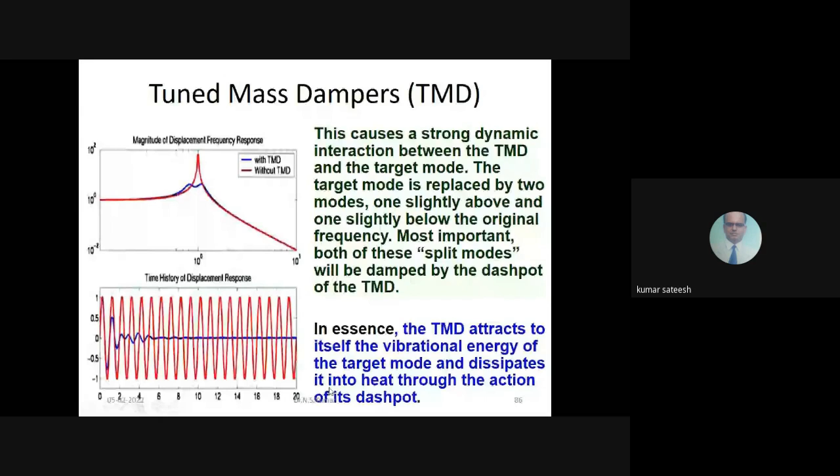And what is your target mode? We can check if it is okay or not, what frequencies I am getting. All these optimum tuning conditions were used in the TMD.

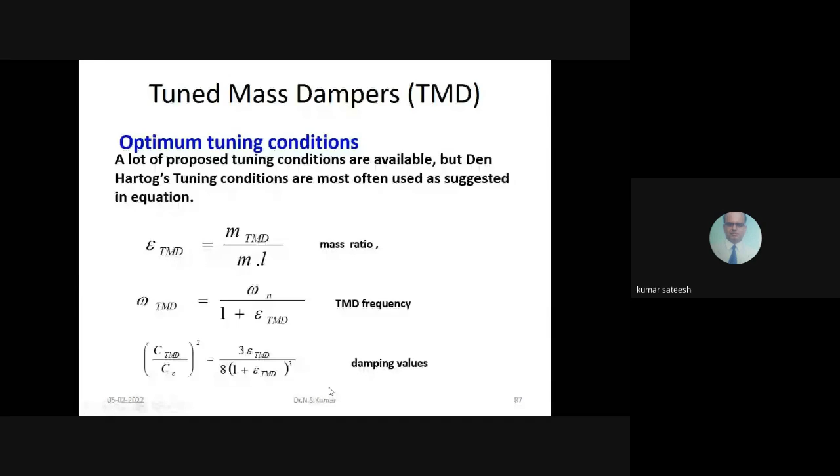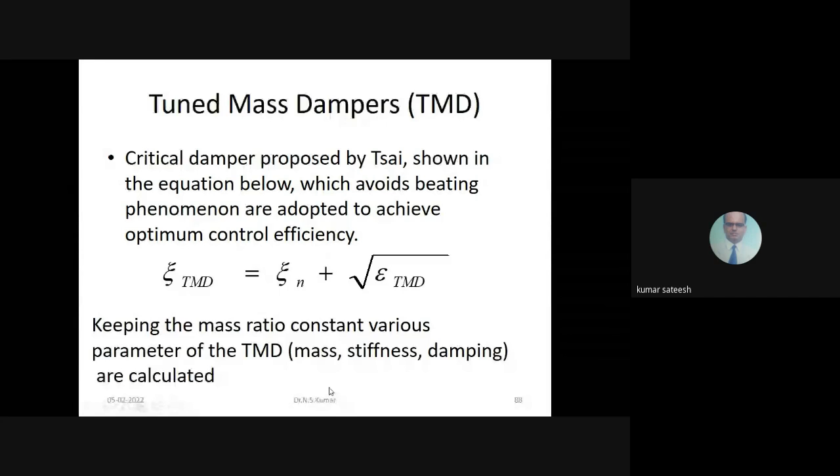Also, a lot of proposed tuning conditions are already available, standard ones, using Den Hartog's tuning conditions, and it has to be tuned as per the mass ratio, TMD frequency, and damping values. Hence we get critical damping position as per Tsai, one of the good contributors, and the equation was used from that research paper. Our analysis matched that, keeping the mass ratio constant. Different parameters - mass, stiffness, and damping - were all calculated.

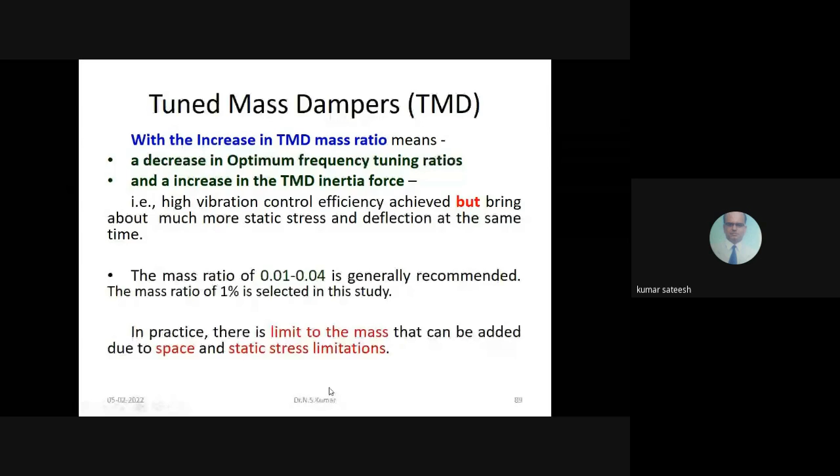See here, these are the tuned mass dampers modeling as per what we used to study in MTech or BTech, your structural dynamics. Differential equations were considered, and the inertia force between the bridge and the tuned mass dampers over time.

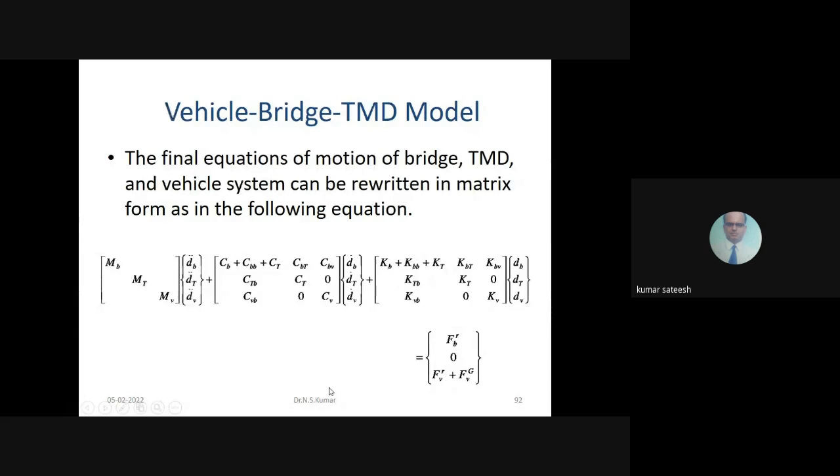These equations were developed as the final equations of motion of the bridge. The mass matrix is diagonal. The second one is the C matrix, called the damping matrix. The third one is the stiffness matrix. The whole thing is equal to different forces acting on it.

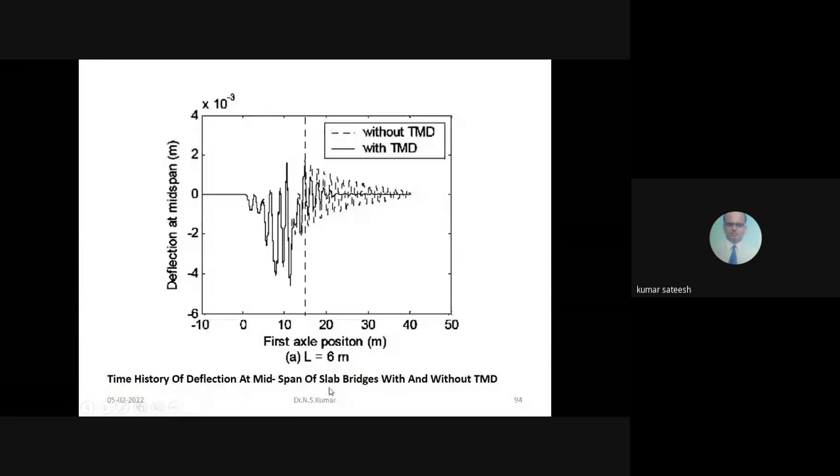So what happened is we got results for different axle positions. What is the deflection at midspan for the first axle position when the span is 6 meters? With TMD and without TMD, time history analysis were considered.

Similarly for different spans - 6 meter, 8 meter, 10 meter, 16.76, standard one, 24.38, 30.48 - all the results combined: without TMD, with TMD, what is the deflection in mm, and how much is the acceleration, for different span lengths.

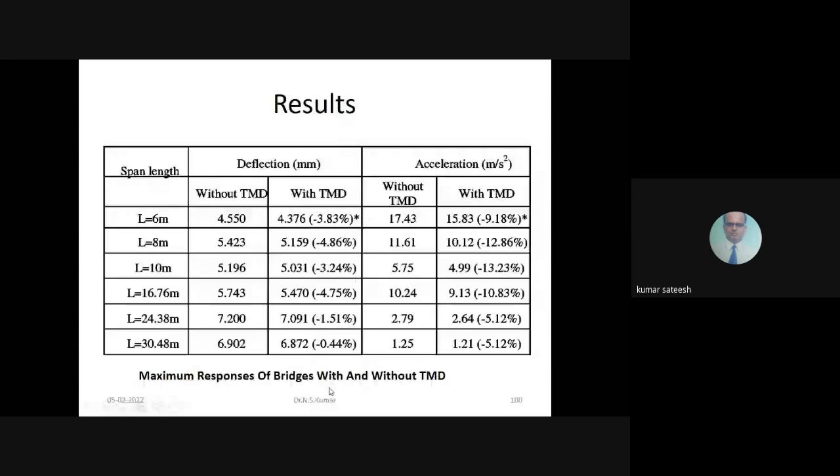These are the observations. Therefore, finally, I wanted to conclude that performance of TMD may be influenced by dynamic characteristics. When the natural frequency of the vehicle matches that of the bridge, the bridge behaves like a vibration absorber.

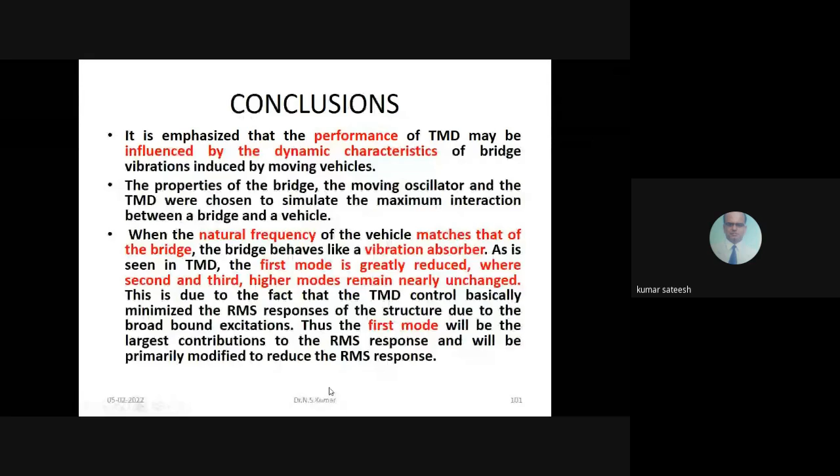As you have seen in TMD, the first mode is greatly reduced and higher modes remain unchanged. The first mode will be the largest contribution to the RMS responses, and mainly we should take care of the first mode itself. These are only some of the important observations and conclusions.

What he is telling is that TMD for reducing the force distribution is more effective than the case with only two trucks moving side by side. So these are some of the control strategies and conclusions we got.

So now the question is, based on so much work, how do you say you are correct or not? We should go for publications, and it should be a good publication. If not, it won't be okay.

So I went and presented at IIT Kharagpur in 2002 itself, at an international conference. Then free vibration of slant skew bridges, some work presented at Bangalore University conferences. Then I went to Coimbatore. Then it was again at IIT Kharagpur - 3 to 4 papers, all in IIT conferences.

Then I went abroad to a world conference on earthquake engineering. I presented at Vancouver, Canada - the 13th World Conference on Earthquake Engineering, on response of slanted bridges. I went and presented, and got some ideas.

Then it was presented at BITS Pilani, and also at international conferences, even in Kuwait, and at world conferences. Then I presented in person in San Francisco, where the topic was on vibration control under dynamic loading.